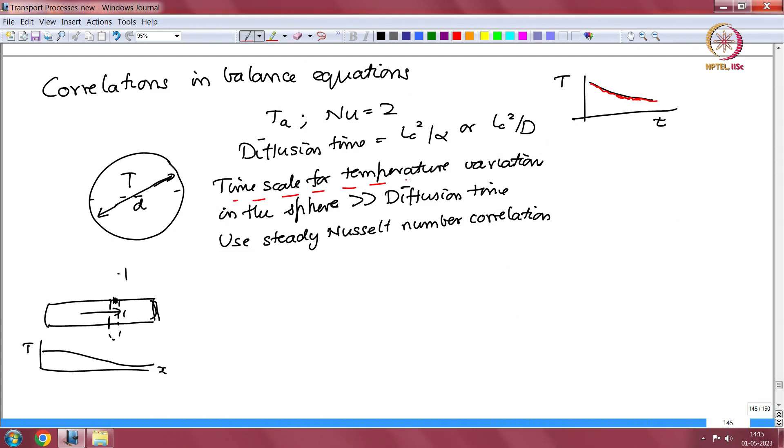However, there are situations where you can use the correlation, and that is when the time for the evolution of the temperature or the concentration at boundaries, or the time for evolution of the boundary itself, is much longer than the time for the diffusion for the temperature or concentration field to reach steady state. So, that is what I had meant in the last time: the diffusion time is much longer than the time for the temperature variation at the boundaries is much larger than the diffusion time.

In the case of, for example, a sphere that is cooling in a fluid, the temperature T at the surface, and T infinity far away, the temperature at the surface evolves because as the sphere cools, there is heat that is conducted into the fluid. And because of that, the temperature decreases. The temperature at the boundary decreases, because in case the thermal conductivity of the sphere is much larger than the fluid, the temperature equalizes rapidly across the entire sphere. So, that temperature decreases.

The correlation Nusselt number equals 2 for the heat conduction from a sphere in the absence of flow assumes that it is at steady state.

So, under what conditions can we use this correlation? For a time varying problem, we can use this correlation so long as the time it takes for the sphere temperature to change is much larger than the time it takes for diffusion to take place. Because the time for diffusion is basically the characteristic length squared by the diffusion coefficient. Note that the diffusion coefficient has dimension of length squared per time.

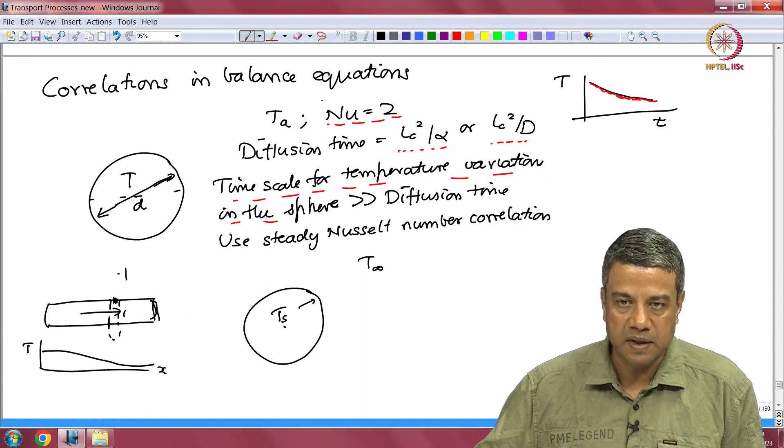So, that is for time dependent problems. For problems where the temperature depends upon position, you generally cannot use a correlation, because the length scale for diffusive transport is comparable to the dimension of the sphere. So, you generally cannot use it in the limit of low Peclet number when transport is due to diffusion.

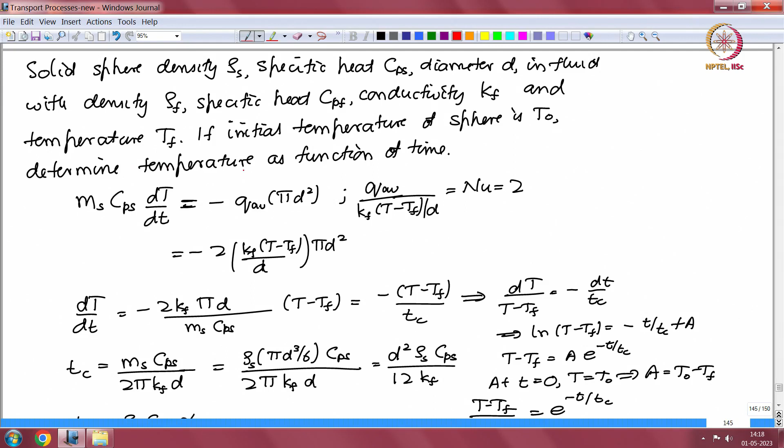And we had solved a problem for the cooling of a solid sphere of density rho, specific heat Cps, diameter d, within a fluid of density rho f, specific heat Cpf, and conductivity Kf. And if the initial temperature is T naught, we had to determine the temperature as a function of time.

So, this was the energy balance equation. The change in energy of the sphere is equal to the negative of the heat that is conducted outwards, which is minus of Q average into pi d square. And for this average flux, we had used the correlation, Nusselt number equals 2.

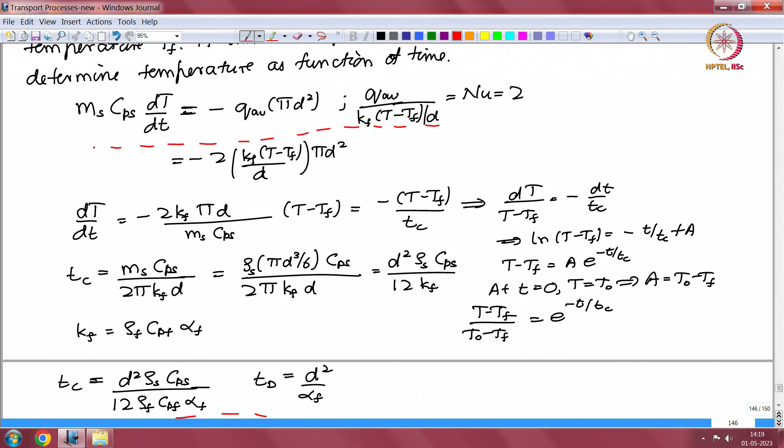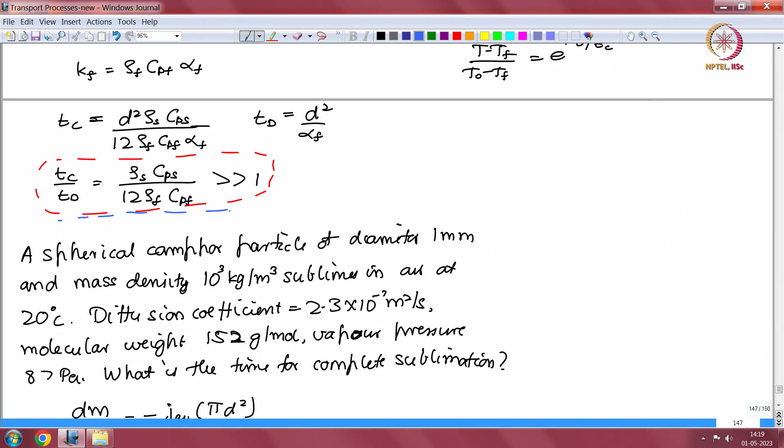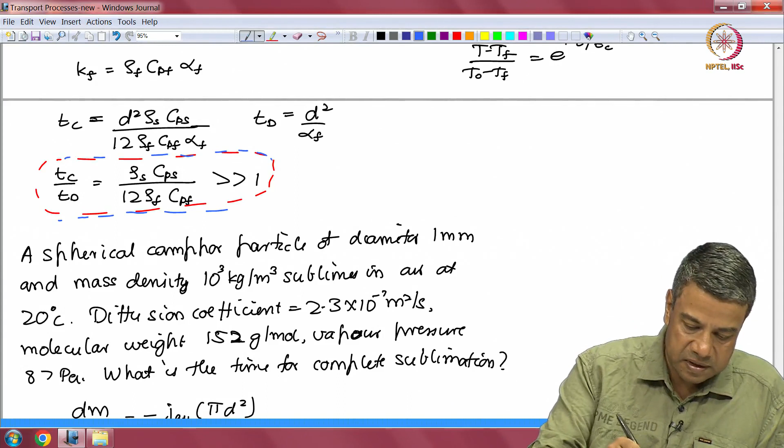And that time we found the condition under which the correlation can be used. The time for the variation of the sphere temperature Tc has to be much larger than the diffusion time d square by alpha f, and we got this condition. Under these conditions, the temperature of the sphere is an exponentially decaying function of time.

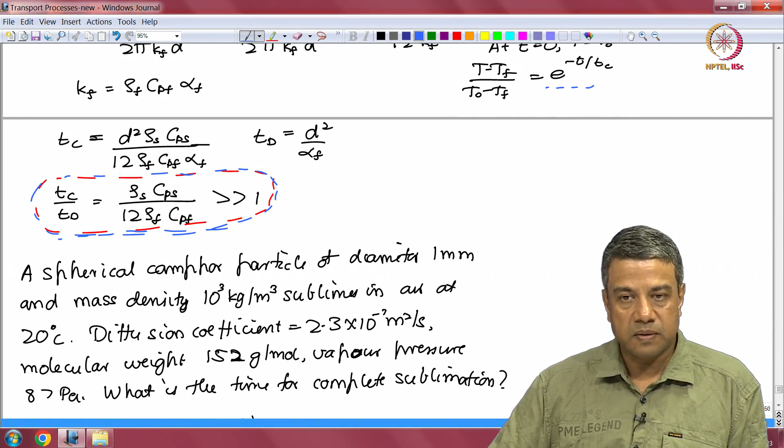This approach can also be used when the boundaries are changing. For example, when a spherical particle is dissolving in a fluid, the radius changes as a function of time, and because of that it is not a steady state problem, since the radius itself is changing as a function of time, though the concentration on the surface is equal to the saturation concentration at all instants of time. So, we had solved that problem as well.

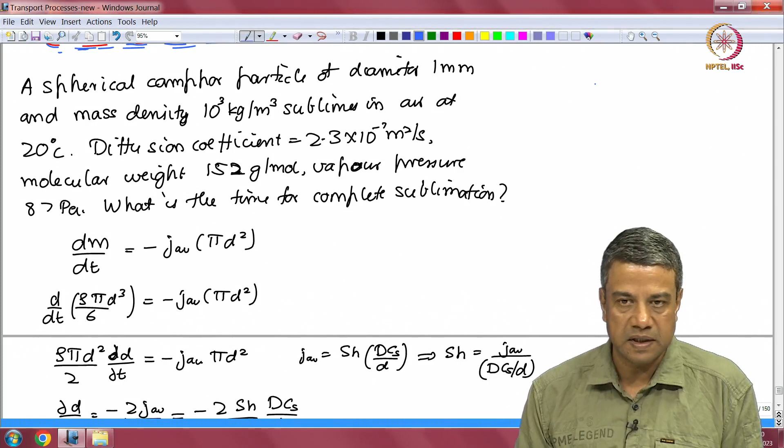The rate of change of mass with respect to time is equal to minus the mass flux times the surface area pi d square. We had expressed the mass in terms of the density, and finally got an expression for the rate of change of the diameter with respect to time. Recall I had said that this is actually a total derivative, but to distinguish it from the letter d that I am using for the diameter, I have used a partial derivative here.

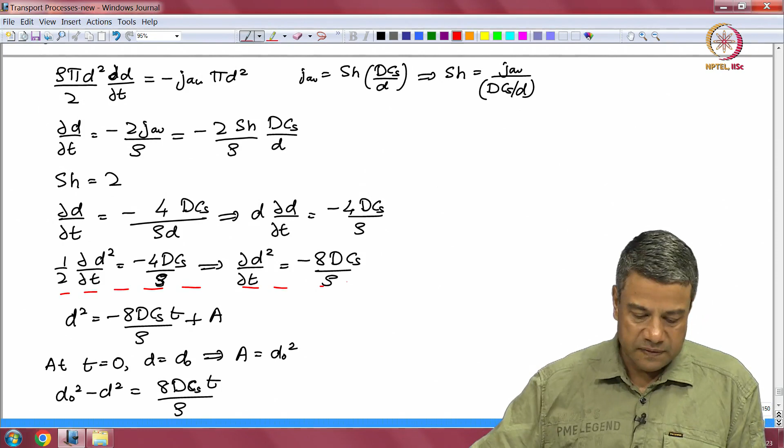And the time it takes for the sphere to dissolve, we had calculated that. That dissolution time is rho d naught square by 8 d Cs. We had calculated the surface concentration,

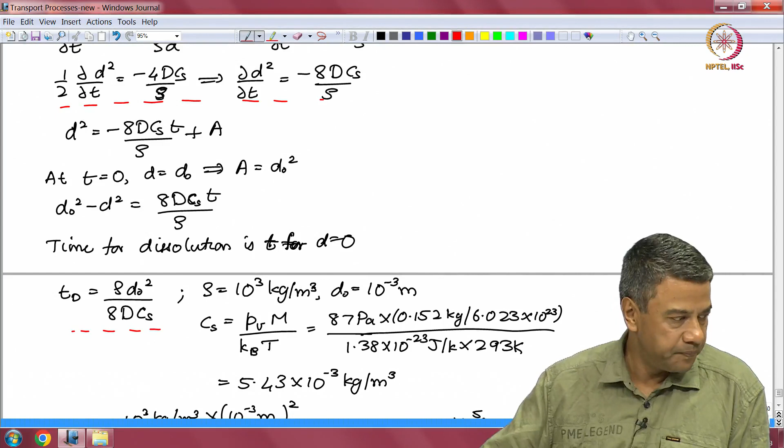saturation concentration in the gas phase at equilibrium with the solid based upon the partial pressure of camphor in air. And based upon that, we had got the time for the diameter of the sphere to completely decrease to 0, that is the sphere to dissolve, turned out to be more than 1 day. Whereas the diffusion time is just d naught square by the diffusion coefficient.

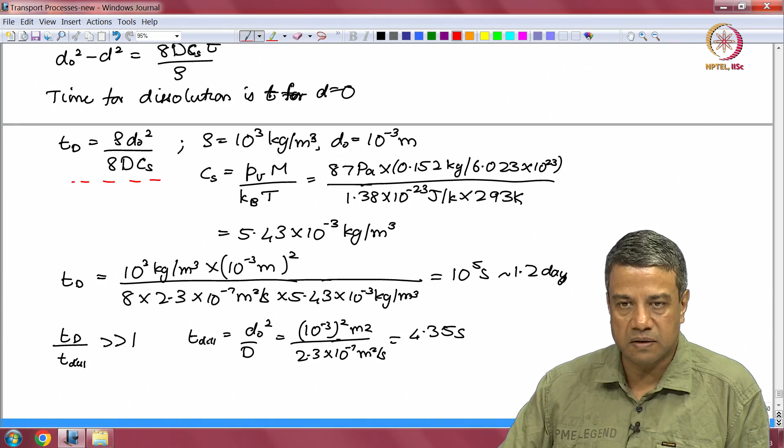For the diameter being 10 power minus 3, 1 millimeter, this diffusion time is approximately a few seconds, 4 seconds. Therefore, this approximation is valid because the time it takes for the diameter to change is much larger than the time it takes for the diffusion of the solute to reach steady state around the sphere.

So, these were simple cases where diffusion was dominant. Now, let us look at some cases where convection is dominant. Forced convection.

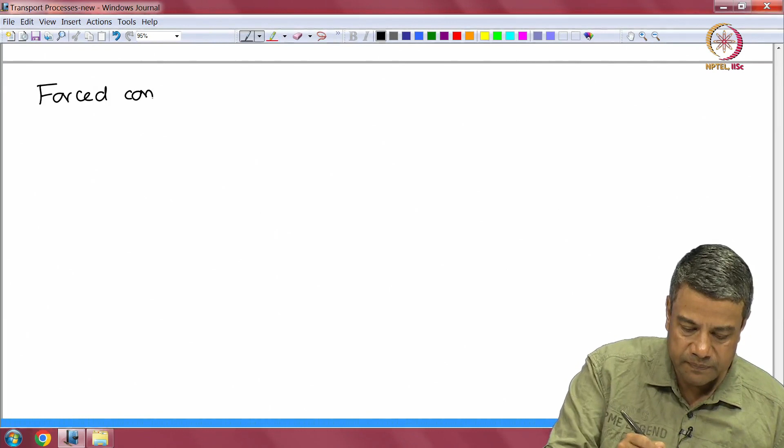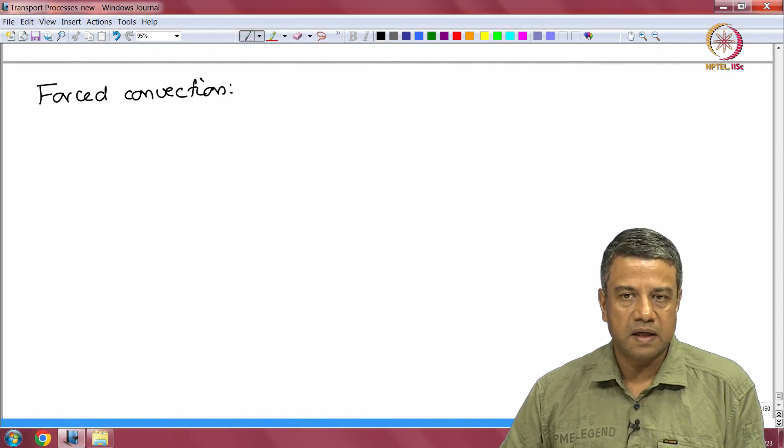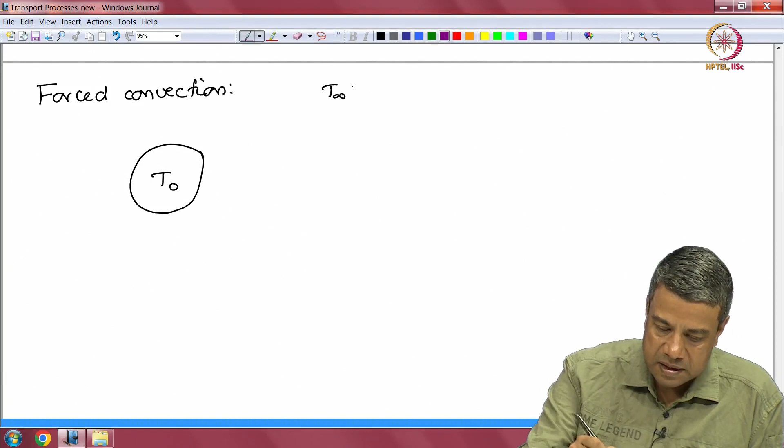I will first try to give you a physical picture of what goes on in forced convection, and then tell you what are the length scales for diffusion when there is forced convection. Let us say I had a sphere which was at a higher temperature T naught, in a fluid which is at a temperature T infinity far away, which is less than the temperature T naught. And there is a fluid flow with free stream velocity Vfs.

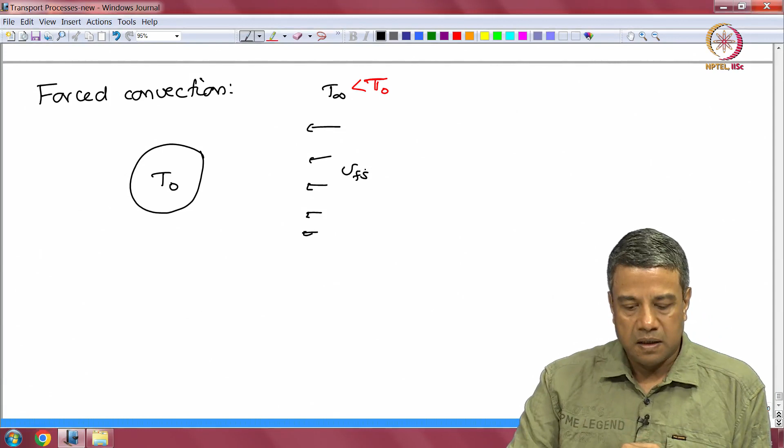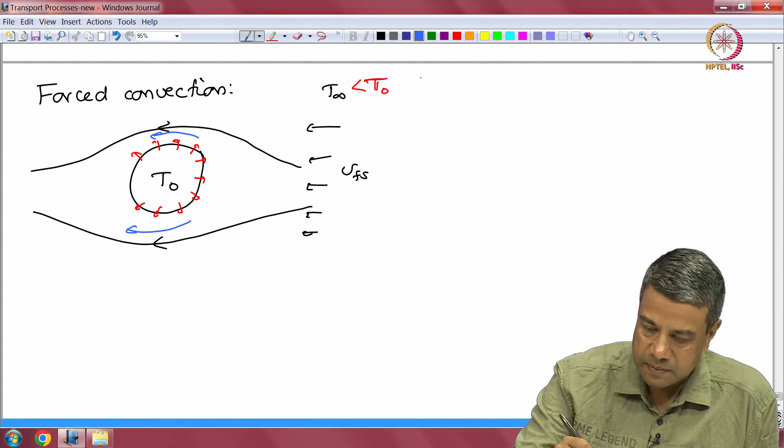Now, as the fluid flows past the sphere, the heat energy that is being conducted out into the fluid is being rapidly swept downstream by the fluid flow, and in the limit when the Peclet number is large, is equal to VFS d by alpha is much larger than 1, where VFS is the free stream velocity, and d is the diameter of the sphere. So, let me just shift this.

In this limit, the disturbance to the temperature field in the fluid - far away from the sphere the temperature field is T infinity. Close to the sphere there will be a disturbance to the temperature field around the sphere due to the convection. That is restricted to a thin region close to the surface called the boundary layer. The boundary layer has a lower thickness on the upstream side and the thickness increases as it goes downstream. So, this is the characteristic length. This distance, this boundary layer thickness is the characteristic length as far as diffusion is concerned in the limit of high Peclet number, because the disturbance due to diffusion is restricted to a thin region.

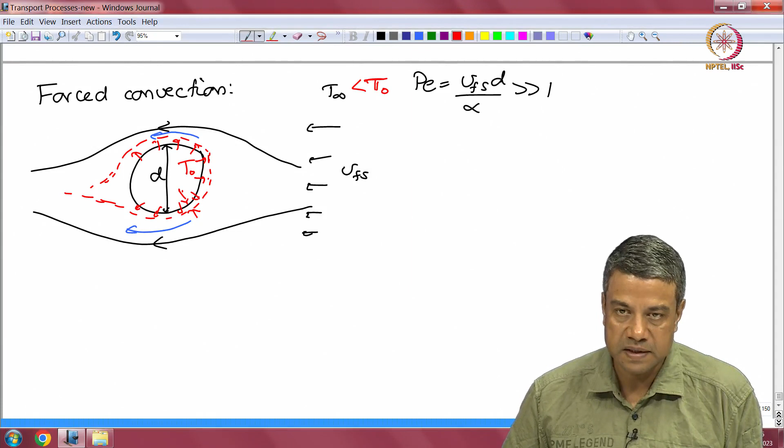It gets convected downstream before it diffuses very far from the surface in the limit of high Peclet number. This is in contrast to the low Peclet number case, where it diffuses a distance comparable to the diameter. The length scale for diffusion is comparable to the sphere diameter. In this case, the length scale for diffusion is much smaller than the sphere diameter. And because of that, the length scale, the time scale for diffusion is also much smaller than the diffusion time over a distance comparable to the diameter d.

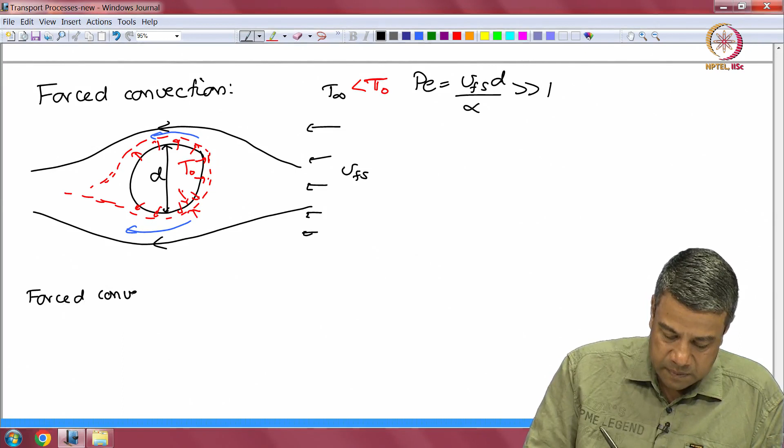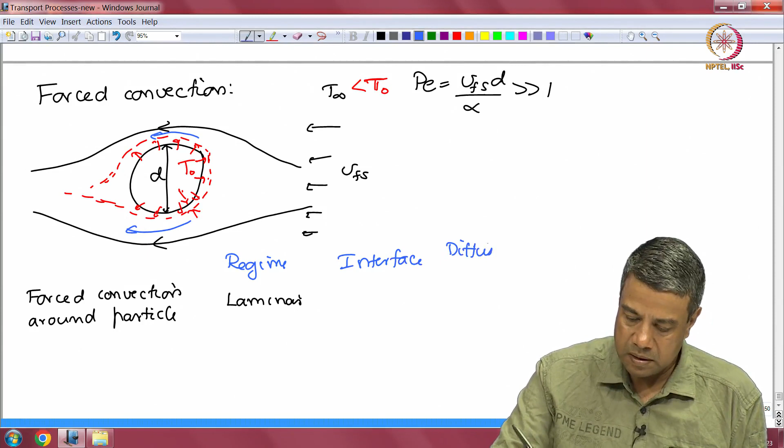So, how does this actually vary? This can be derived, I will not do it here. So, if I have forced convection around a particle, in a laminar regime, and I will put this as diffusion length by LC.

For laminar regime, the interface is rigid. So, this is a rigid interface for a particle. In that case, the diffusion length divided by the characteristic length goes as Pe power minus 1 by 3. It scales as Pe power minus 1/3 in the limit of high Peclet number. Note that all of this is in the limit Pe equals VFS d by alpha much greater than 1. That means the length to which the heat diffuses is Pe power minus 1/3 times the diameter of the sphere.

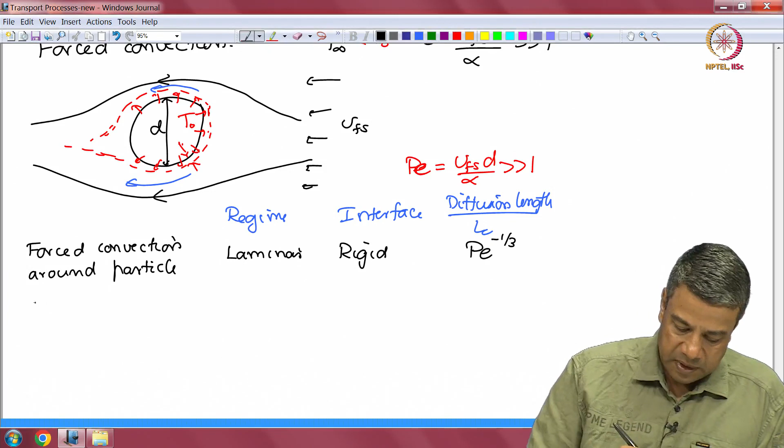Around a bubble, this could be laminar, or laminar flow in both the limits of high Reynolds number and low Reynolds number. Recall that forced convection around a particle, the laminar flow is only at low Reynolds number. At high Reynolds number, you have formation of a separation bubble at the rear, then formation of a wake with vortex shedding, and then a turbulent wake, and so on. This scaling law that I have derived for you is only for laminar flow, at low Reynolds number.

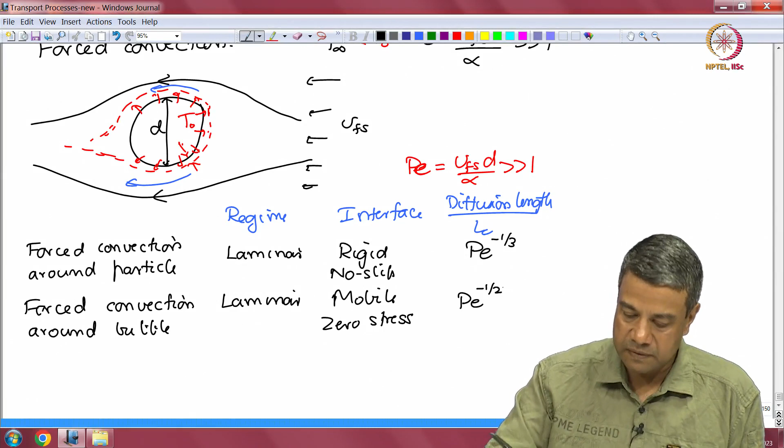For a bubble, recall that you have a laminar flow even at high Reynolds number, provided the interface is mobile. There are no surfactants which tend to make the interface rigid. So this is a mobile interface at which the zero stress condition applies, whereas for a particle, the zero velocity condition, no slip condition, is applied. Here the no slip condition is applied, whereas for a bubble the zero stress condition is applied. And in this case the boundary layer thickness goes as Pe power minus 1 half. So it is 1/3 for a rigid interface and minus a half for a mobile interface.

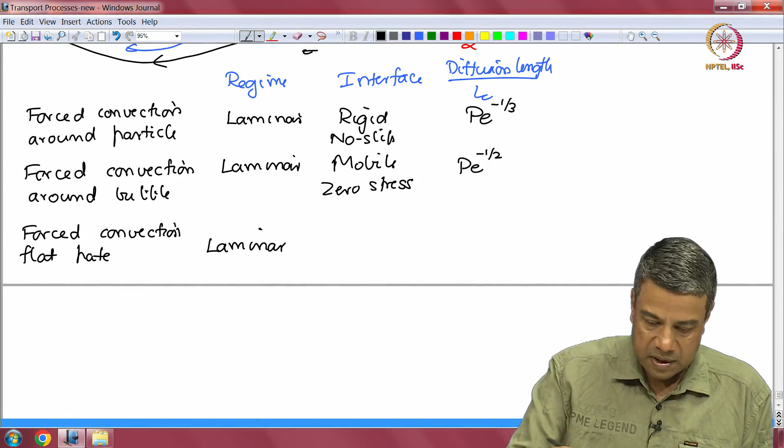Flat plate, forced convection, flat plate. Once again this is for laminar flow. Note that in the case of a flat plate, generally the Reynolds number is much larger than 1. And we have a rigid interface, and in this case it is equal to Re power minus 1 by 6, Pe power minus 1 by third, or Re power minus half, Pr power minus 1 by third. This works for laminar flow around a flat plate, in the limit of Re much greater than 1. Now, forced convection, falling film.

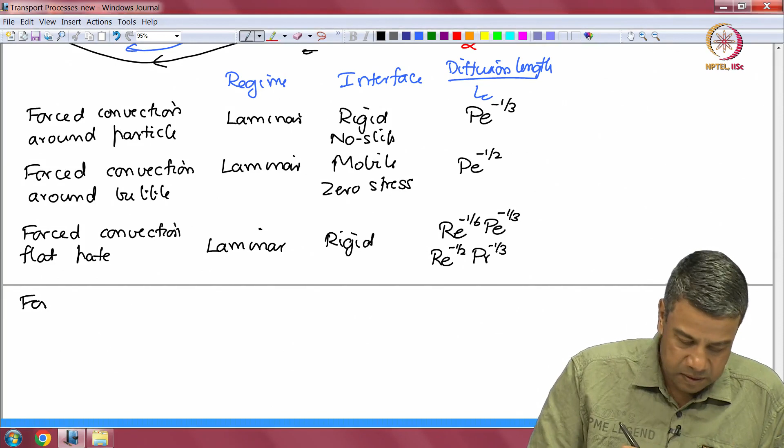Note that this was mass or heat transfer to a falling film at a mobile interface, zero stress condition at the liquid gas interface. Once again laminar. This is mobile interface, zero stress. And this goes as Pe power minus half, H by L power minus half, where L is the length of the film and H is the thickness.

Recall that we had considered a film at a rigid surface. You had a parabolic profile. H was the thickness of the film, it was falling due to gravity, and L is the length. This is equal to H by L power minus half, or L by H power half. So this thickness increases as the film length increases, and it goes as Pe power minus half. Obviously, this diffusion length will be much smaller than the film thickness only when H by L, that is L by H, is much smaller than Pe. Otherwise, this diffusion length will become comparable to the thickness of the film, and then we can no longer use this approximation for the diffusion length.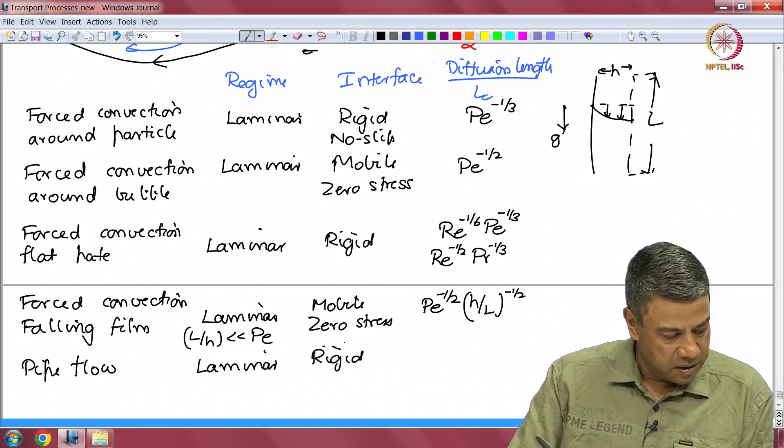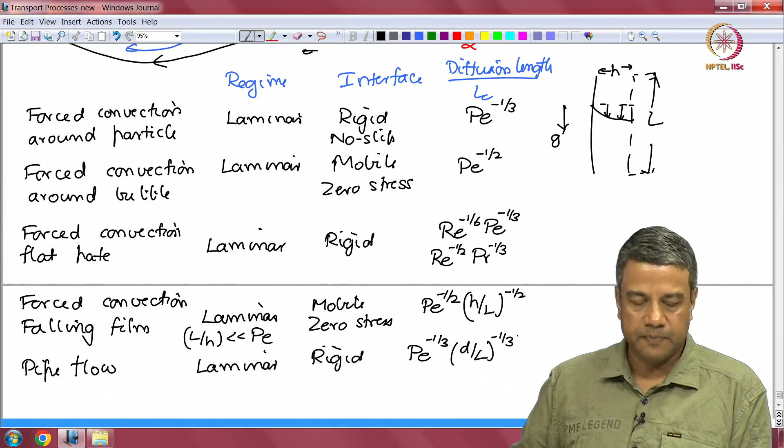Similarly, for a pipe flow, laminar, with a rigid surface, no slip condition, the thickness is P power minus 1 by 3 into D by L power minus 1 by 3, where D is the diameter and L is the length. Recall that for a pipe flow, the diameter was D and the length was L. So these are the diffusion lengths.

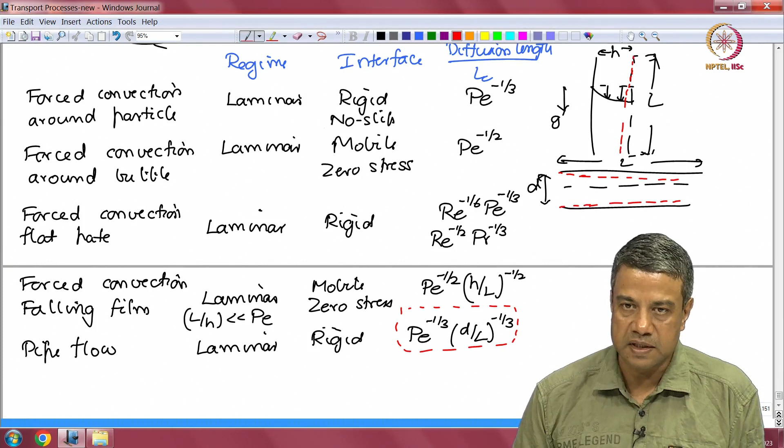So in the falling film, for example, diffusion is limited to a thin region close to the surface. Similarly, for a pipe flow, the diffusion from the walls, the heat transfer from a pipe for example, from the walls is restricted to a thin region close to the wall of the pipe. And the thickness of this region divided by the pipe diameter is given by this. And so, because these are restricted to thin regions, the diffusion time is also much smaller for these cases than it is at low Peclet number. So the diffusion time is equal to the diffusion length squared by the diffusivity. For example, for this particular case, the diffusion length goes as the characteristic length times P power minus 1/3.

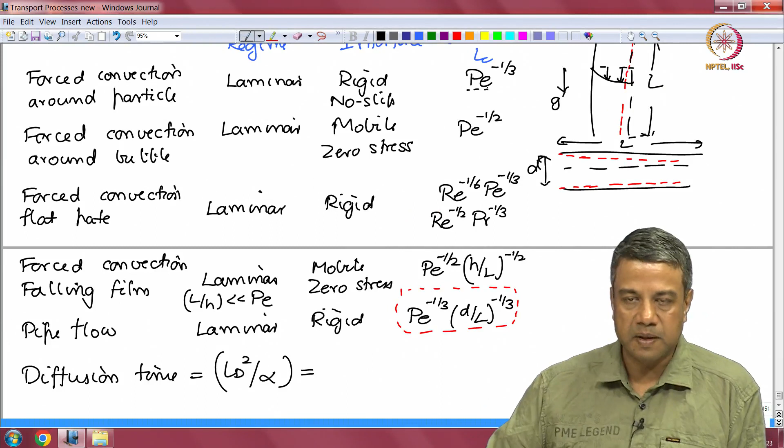So this will be okay, p power minus 2/3 times L c square by alpha. In the diffusion dominated regime, the diffusion time was just L c square by alpha. Here the diffusion time is p power minus 2/3 times L c square by alpha.

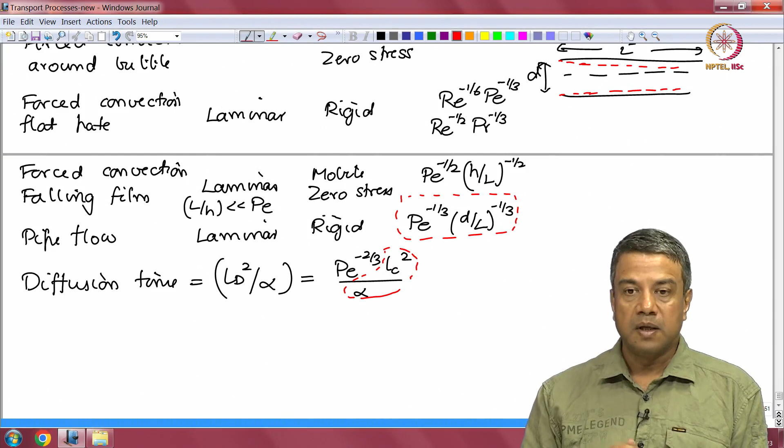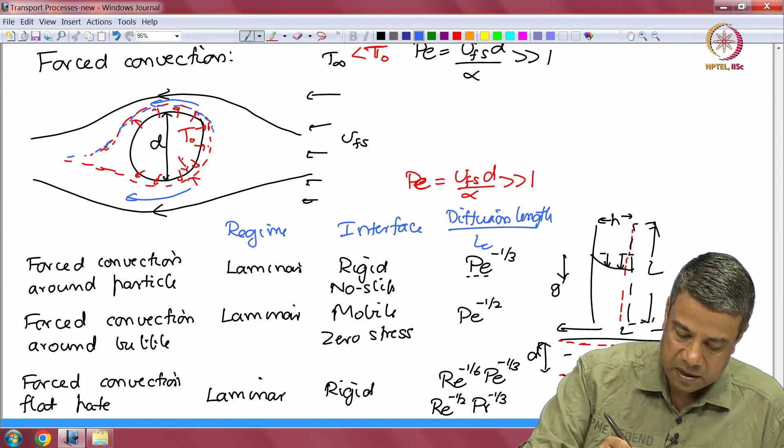So it is actually much smaller in the convective regime, because the diffusion has to take place only over a relatively small region here, at high Peclet number, as the boundary condition at the surface changes.

Similarly, in this case for the falling film, the diffusion has to take place over a distance much smaller than the film thickness, or in this case the pipe diameter. Because of strong convection, any diffusion from boundary surfaces is rapidly swept downstream, and therefore material diffuses only a small distance, much smaller than the characteristic diameter, into the fluid.

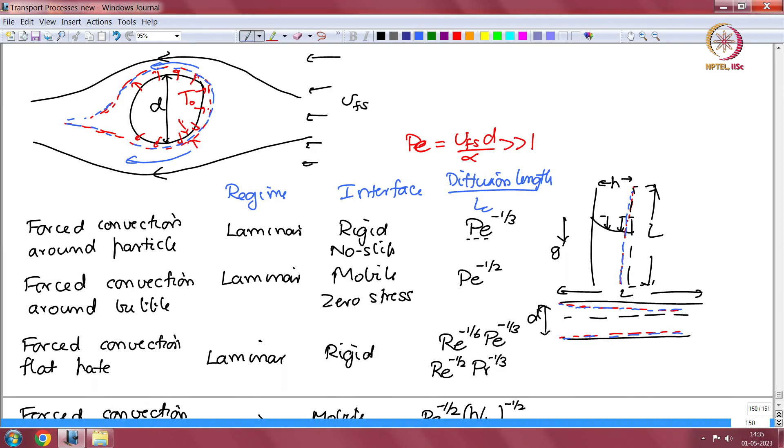And therefore, the diffusion length is much smaller than the characteristic length in all of these cases, where the characteristic length is the diameter for particles, the pipe diameter for pipe flow, the film thickness for a falling film, and the length of the plate for a flat plate.

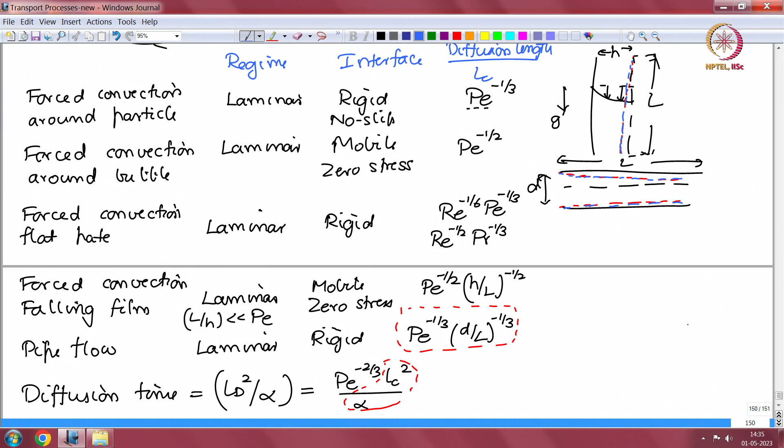So in these regimes we can assume, provided the time for variation of the temperature or concentration at the boundaries, or the time for variation of the boundaries itself, in case a particle is dissolving for example, is much longer than this diffusion time, that the system is at steady state.

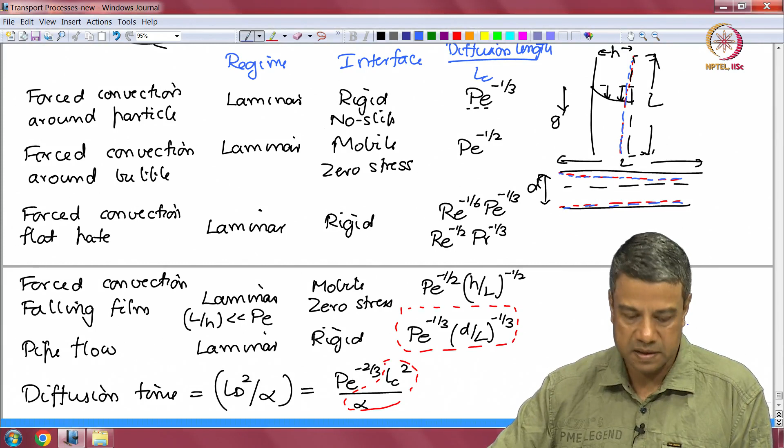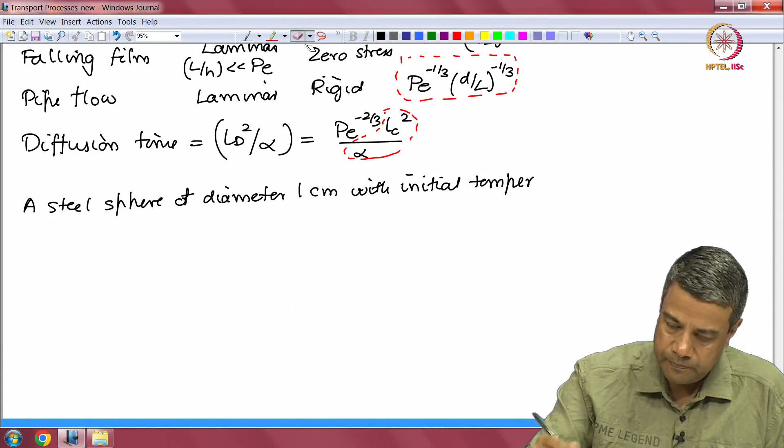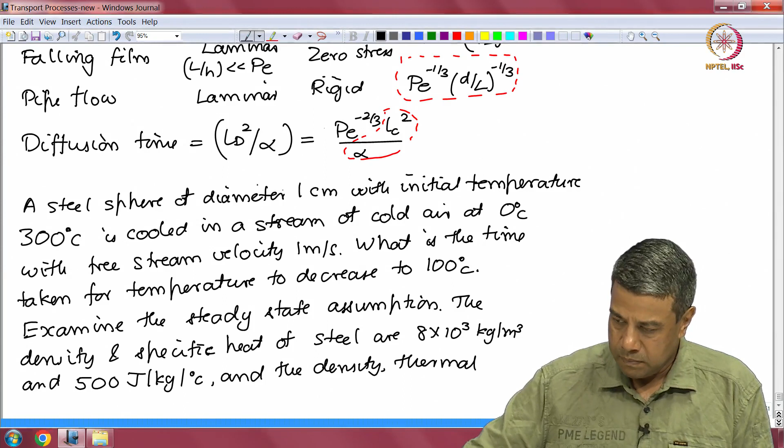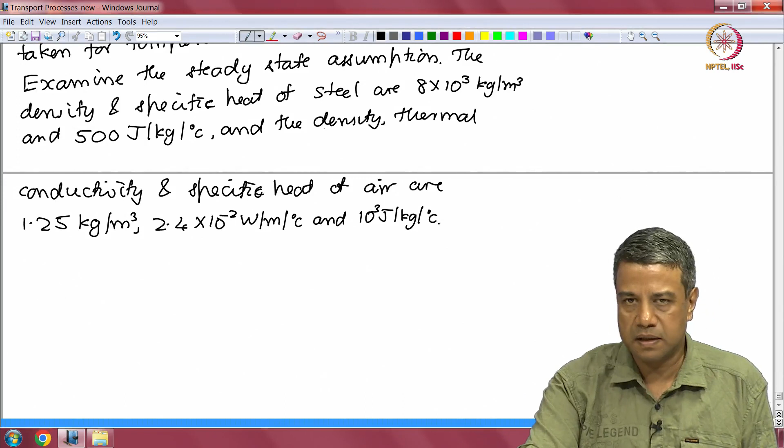So let us take the example of natural convection, forced convection of heat from a sphere. A steel sphere of diameter 1 centimeter, with initial temperature 300 degrees centigrade, is cooled in a stream of cold air at 0 degrees centigrade with free stream velocity 1 meter per second. What is the time taken for the temperature to decrease to 100 degrees centigrade? We examine the steady state assumption.

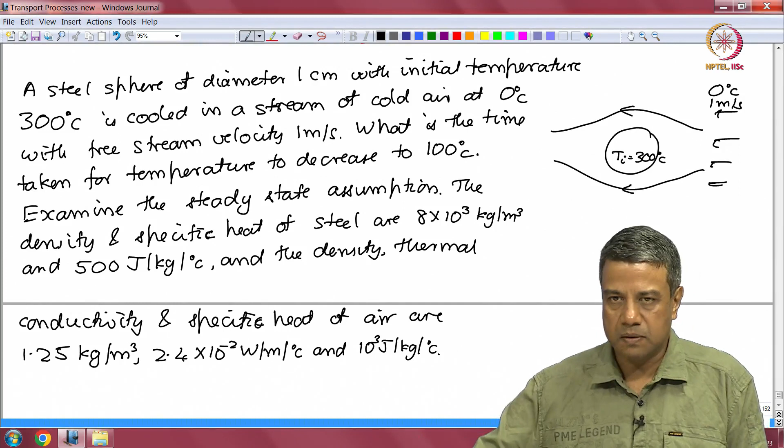So, first thing we have to estimate is what is the Peclet number. For this we need the diffusivity of air. The thermal diffusivity of air is the thermal conductivity divided by rho Cp.

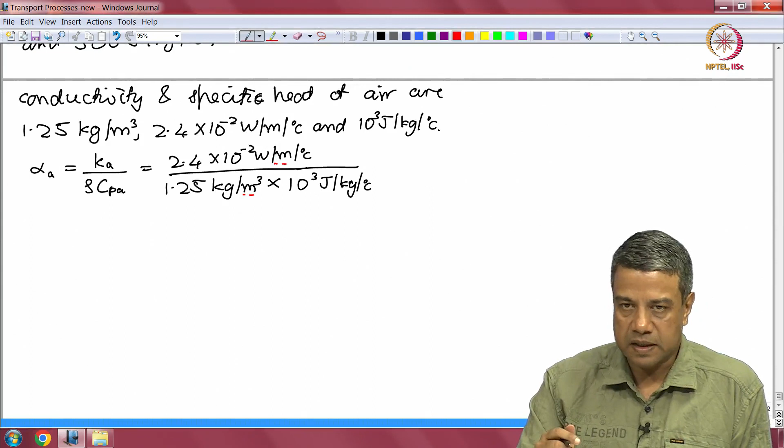The thermal conductivity is 2.4 into 10 power minus 2 watts per meter per degree centigrade, divided by the density, which is 1.25 kg per meter cubed, into the specific heat, which is 10 power 3 joules per kg per degree centigrade. You can verify that this number will ultimately have dimensions of length square per time, if you do the calculation: watts per joule is 1 over second, watt is joules per second, kg will cancel out and degree centigrade will cancel out.

And this gives you a value of about... sorry, this gives a value in meter square per second. As I told you, the thermal diffusivities in air are generally of the order of 10 power minus 5 meter square per second. All diffusivities - mass, momentum and energy diffusivity - are all roughly of the same order of magnitude, 1.92 into 10 power minus 5 meter square per second.

Based upon this, the Peclet number is equal to Vfs times the diameter of the sphere divided by the diffusivity of air, which is 1 meter per second into 1 centimeter, that is 10 power minus 2 meter. This is 520.83.